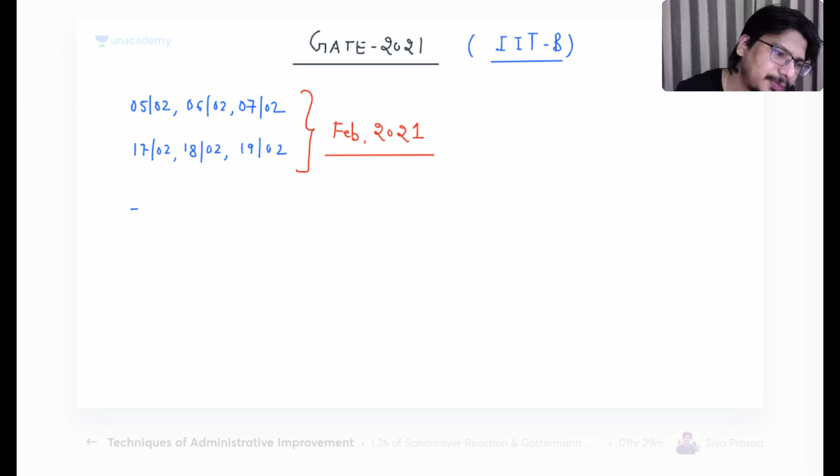Okay, next big information, please listen carefully to whatever I am saying. Now third year students are also eligible for writing the exam. Whoever are third year students, they are also eligible for writing the GATE 2021 exam. Those who have just entered fifth semester, they can prepare for the exam and write it in 2021.

Now the next point, which is very important from the GATE 2021 point of view, listen carefully. Now you can write the GATE exam if you want — it's optional. If you want, you can write GATE with 2 papers.

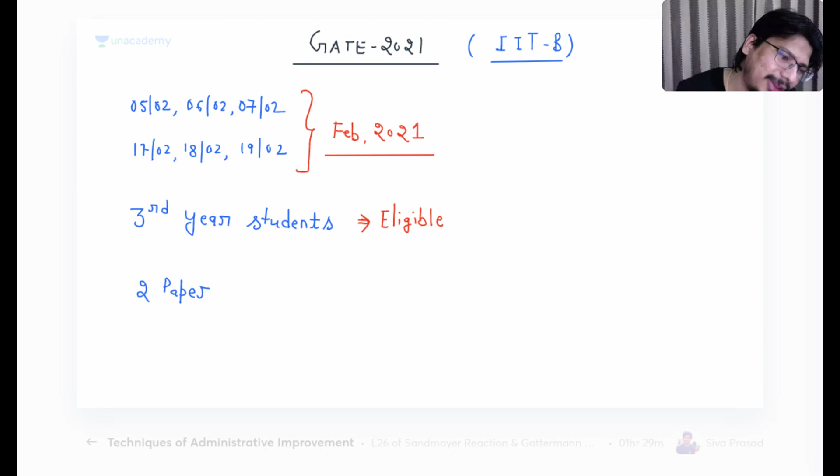आप एक पेपर मैकेनिकल ले सकते हैं, आप एक पेपर सिविल ले सकते हैं, और दूसरा कोई भी पेपर चूज कर सकते हैं. वो सब्जेक्ट्स क्या क्या हो सकते हैं उसकी टेबल आएगी आपको कि आप कौन कौन से सब्जेक्ट चूज कर सकते हैं. If you are in mechanical, if you are writing your one exam with the mechanical background, what are the other subjects you can choose, तो उसकी टेबल आपको जल्दी ही मिल जाएगी.

Yes दिव्यांग, at my time earlier we used to write the gate exam in third year also. तो याद रखना 2 पेपर और हैं. Yes, you can write.

So all this information right now is not on website because today is Sunday, तो अभी शायद नहीं होगा. Maybe by Monday it will be getting updated on website also.

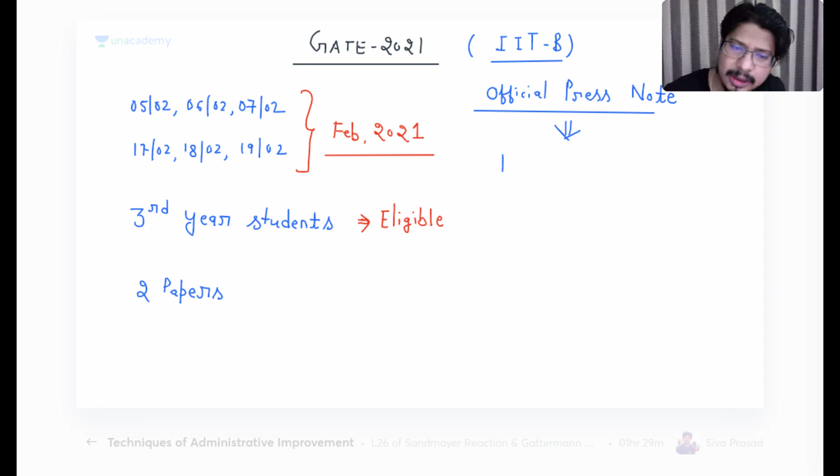Sir, from where you got this information, my friends? We got the official notification given by IIT Bombay. Official press release from IIT Bombay. एक ऑफिशियल प्रेस रिलीज निकला है, प्रेस नोट निकला है, ऑफिशियल प्रेस नोट रिलीज हुआ है. वहां पर ये सब इंफॉर्मेशन है. There we are having all this information. Yes, and this was there on the Facebook page of Director IIT Bombay. डायरेक्टर IIT बॉम्बे के अगर आप फेसबुक पेज पर जाएंगे तो आपको ये इंफॉर्मेशन मिल जाएगी.

Bittu is asking, sir, benefits of 2 papers. There are so many interdisciplinary branches. When you are going for the higher education, there will be so many interdisciplinary branches, तो आपके लिए admissions के options ज्यादा खुल जाएंगे. You will be having more options of admission in your MTech.

XE के पेपर के बारे में इंफॉर्मेशन चाहिए? चलिए, I will be giving you 5 minutes information on XC also. XC होता क्या है? Let me tell you. Are you interested for knowing the information about XC also? क्या आप जानना चाहते हैं? Are you interested? What is XE? Okay.

देखिए मैं आपको बताता हूं. XE represents engineering sciences. Now what happens in XE? I will be telling you बेटा. देखो ध्यान से, XE में क्या होता है? आपका पूरा पेपर, it will be divided into 2 parts. The complete paper will be divided into 2 parts. Part 1 is general aptitude. जो पहला पार्ट होता है वो जनरल एप्टीट्यूड होता है, जो कि लगभग हर पेपर में होता है.

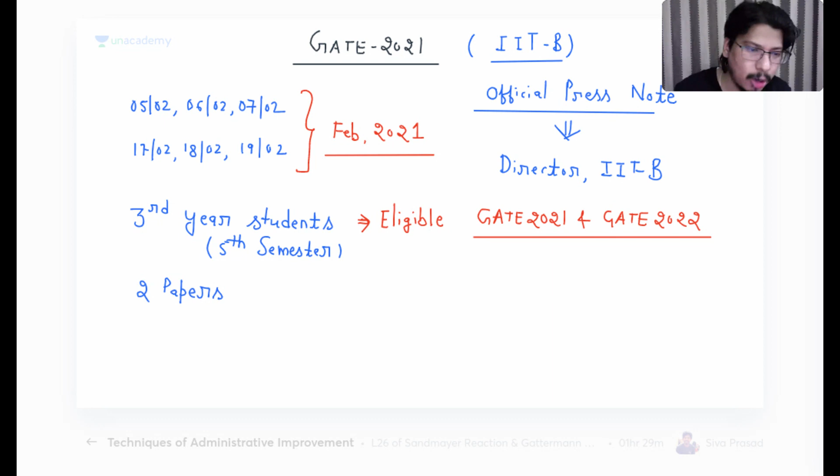Those who are in third semester right now, remember, now you are not having 2.5 years, because you will be writing your first GATE exam in 2022, and you will be writing your next GATE exam in 2023. So now you don't have much time left.

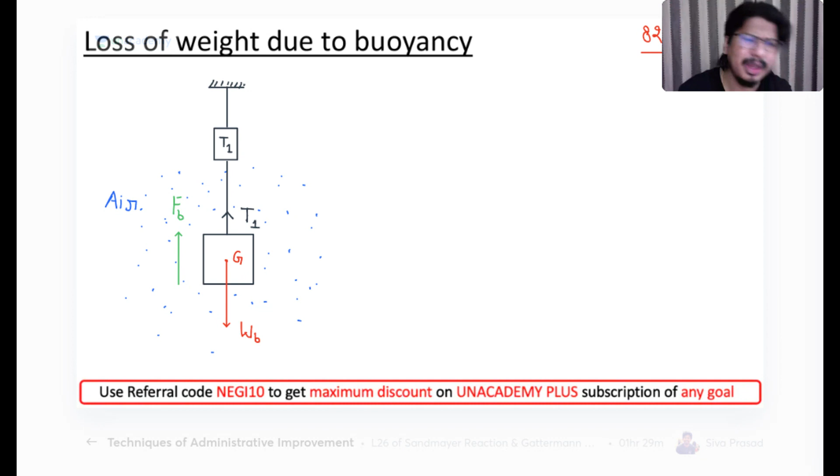Yes, very good, Malik. Now anyone in the class can tell me, what will be the force equilibrium? Can you tell me what will be the force equilibrium, beta?

Yes, total vertically upward force, that is T1 plus FB, must be equal to WB. Now that means T1 is equal to WB, weight of the body, minus the buoyant force acting on the body.

Anyone in the class, what will be the buoyant force acting on the body?

Anyone in the class? Density of air into volume submerged. How much will be the volume submerged? Whatever is the volume of the body, that is your volume submerged. Yes or no? Excellent, yes. So rho A into volume of the body into G.

What is the density of air - is it very high or very low? Bolo re baba, density of air is very high or very less? Yes, it is very low. So what is going to happen? Since the density of air is very less, this is negligible.

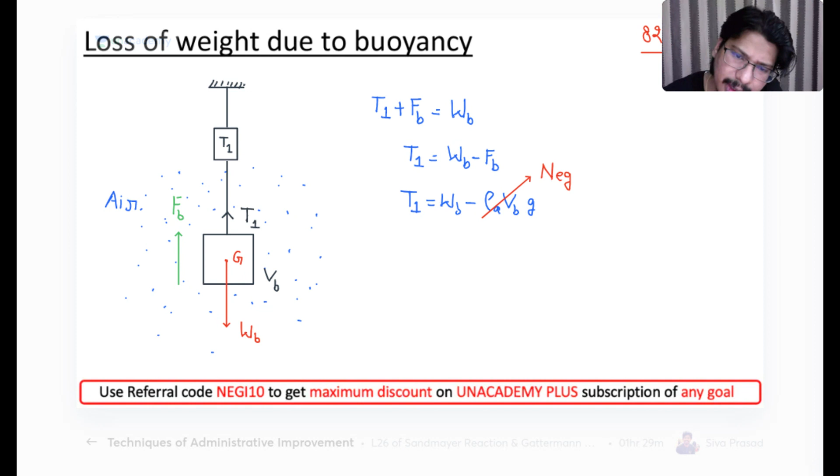I have told you earlier also in my class that buoyant force exerted by air is negligible. So what I'm getting is T1 is nearly equal to what? T1 is nearly equal to WB.

Now what is this T1? Can I say T1 is almost whatever the reading T1 I'm getting? T1 is the reading of the tensionometer. So can I say one thing clearly? T1 is representing the real weight only. Can I say whatever this T1 reading I'm getting, that is actually your real weight. It is equal to weight of the body.

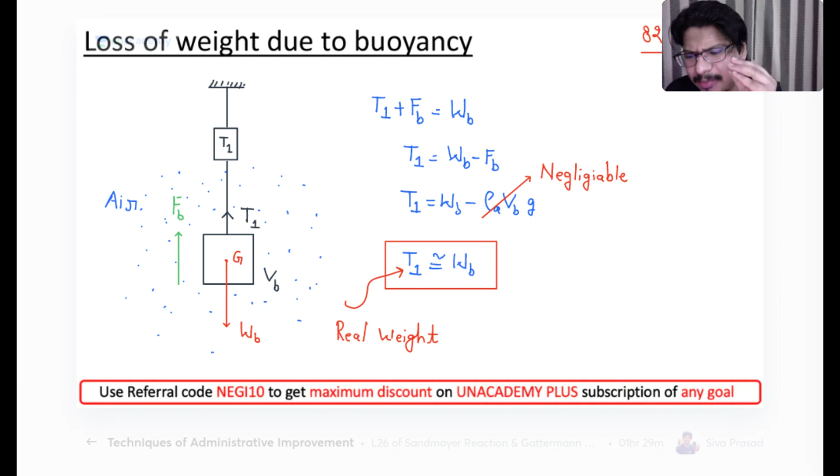Can I say whatever this T1 reading I'm getting - this is what we apply in Engineering Mechanics. Yes yes yes. So whatever the reading T1 I'm getting, that is giving me the real weight.

Now listen carefully. Now, yes, clear. Listen carefully. Let us suppose, Chirag, welcome beta. Let us suppose, now listen carefully, let us suppose I am having the same body.

Let me say this is the centroid, this is the center of gravity of the body. Let me call it like this. And from here, weight of the body is acting. Now listen carefully, let us suppose this is hanging with some rope, this weight is hanging with some rope.

Oh my god, what will happen? Please observe, beautiful thing, now look at here. Let me say this body is completely submerged in water. Let me say density of the water is represented by rho W.

Rho W is equal to constant. Let me say the volume of the body is VB. Can I say this water will be applying some buoyant force on this body?

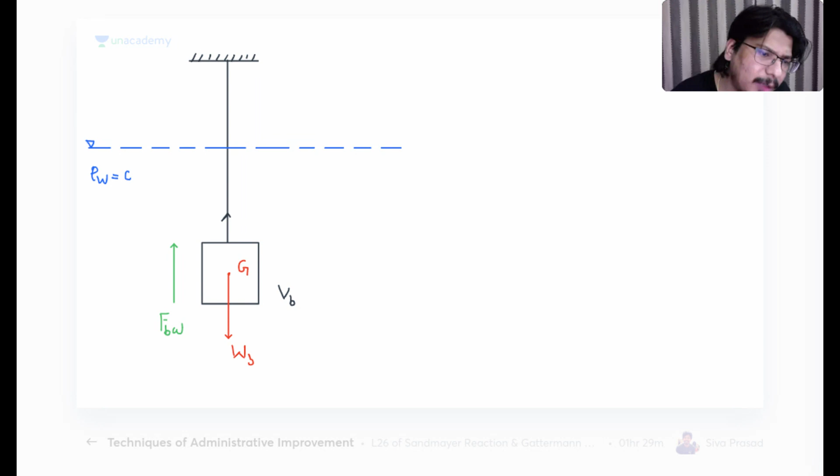So let me say the buoyant force applied by water on this body is FBW. 100%, there is no doubt, 100% there will be some tension in the rope. And let me say this tension I am measuring with the help of some tensionometer. 100% the reading of this tensionometer will be

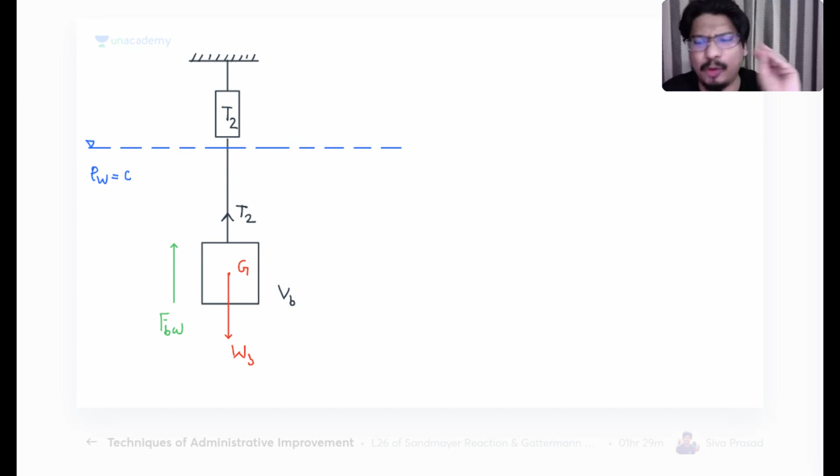T2. Now anyone in the class - yes, you can't neglect density here. Yes, Swaru, very good. Can you tell me if I apply the force balance here, what will be the force balance giving me?

Bolo re baba. Total vertically upward force is equal to total vertically downward forces. So what I'm going to get is T2 plus FBW is equal to WB. So T2 is how much? WB, weight of the body, minus buoyant force applied by water.

Anyone in the class can tell me what will be the buoyant force applied by water? Since this body is completely submerged in water, it is density of water, volume submerged into G. Now here you cannot neglect this buoyant force.

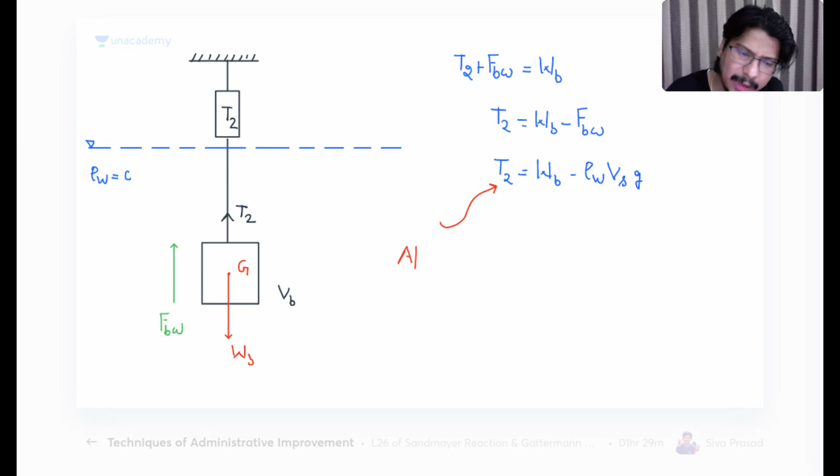So 100%, whatever the reading T2 I'm getting, whatever the reading of the tensionometer T2 I'm getting, that is not the actual weight, that is not the real weight. That is known as what? Anyone in the class? This is not the real weight, this reading is not giving me the real weight. It is giving me the apparent weight. Yes, excellent, this reading is giving me the apparent weight.

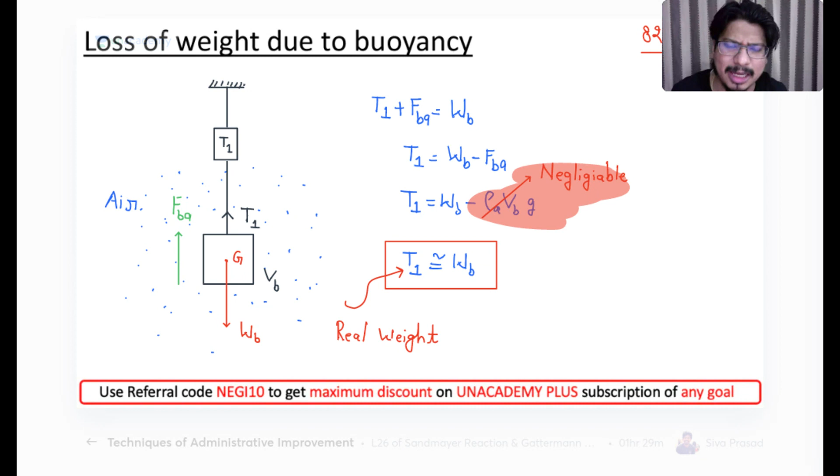When I put a body in air, I get the real weight because the buoyant force applied by air is negligible. But when I put the same body in liquid, in water, the buoyant force applied by the water is not negligible. Because of that, the reading T2 that I get is not the real weight, it's the apparent weight. Are you able to understand?

Now listen carefully. Let me say this was equation number A. Let me say this is equation number B.

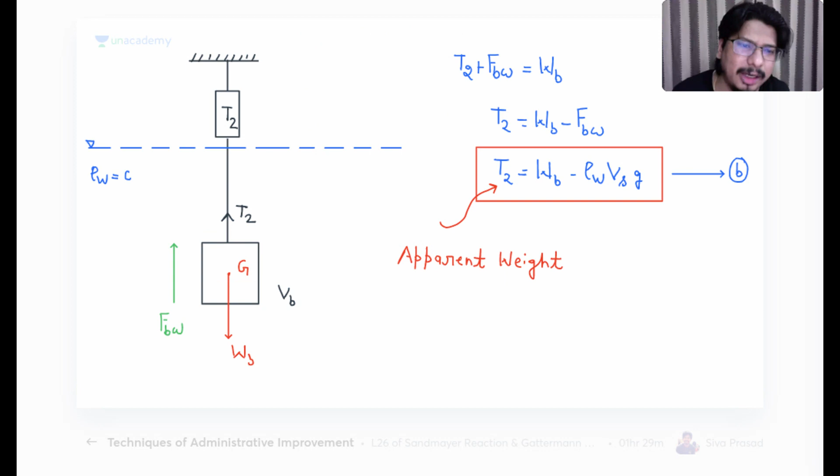What are you getting from equation A and equation B? Can I say, T2 in place of WB? What is WB? Weight of the body. Weight of the body is T1. So can I say T2 is equal to T1 minus something?

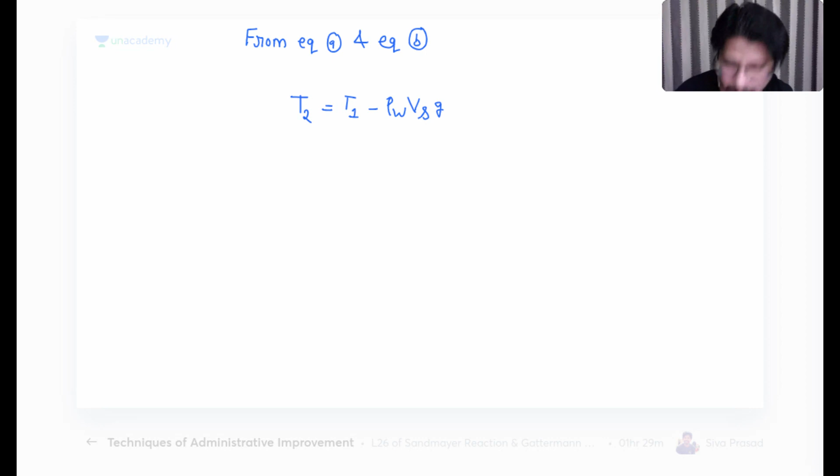Rho W Vs into G. I hope you are able to understand this equation: T2 is equal to T1 minus rho W Vs into G. Is it clear to everyone?

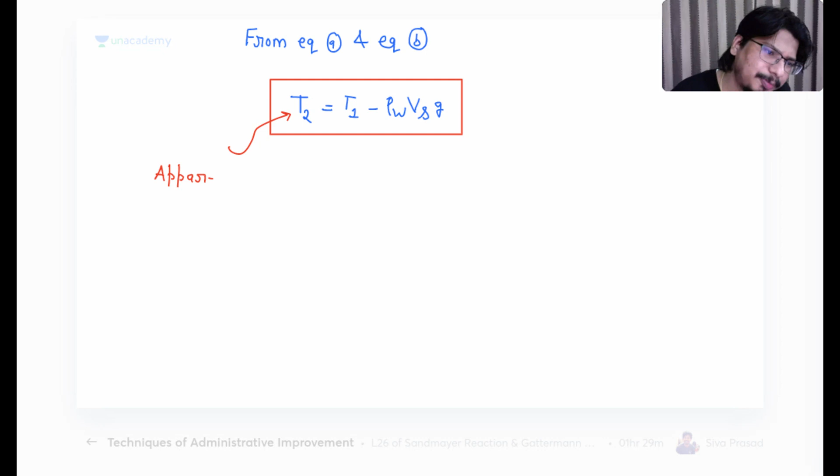Now listen carefully. What is this T2? T2 is apparent weight. What is T1? T1 is the real weight. So apparent weight is always less than real weight.

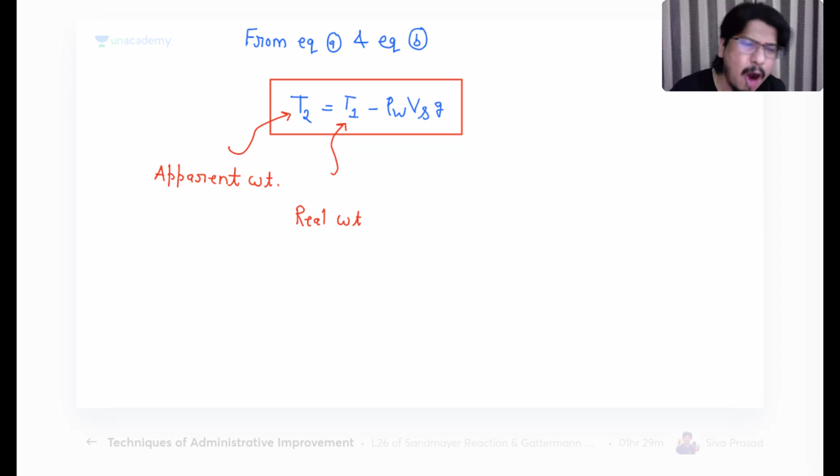How much less? This much less represents the loss of weight. Basically, loss of weight is the buoyant force applied by the liquid.

Is it clear to everyone? Yes sir, yes sir, very much clear, very much clear.

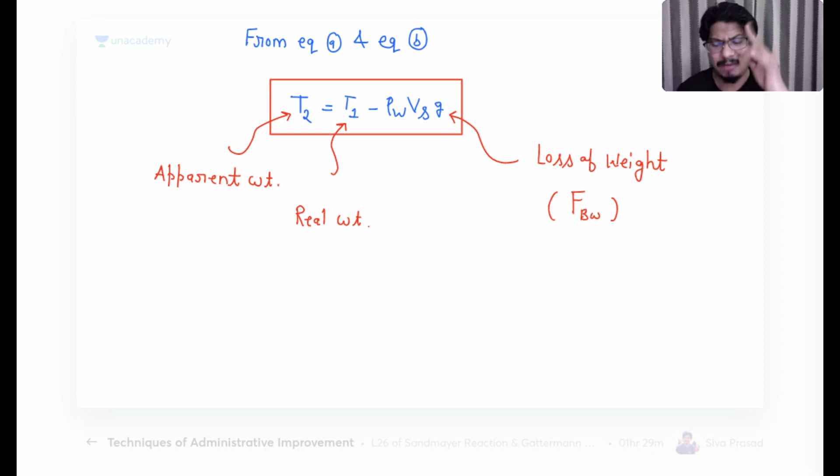Then I will be asking you one beautiful interview question. Try to answer me. Look at here, my friends, try to understand what I'm saying.

Let us suppose I'm having a container, and this container has some liquid, and this is the free surface of the liquid. Let me say the weight of the liquid is WL, and the weight of the container is WC.

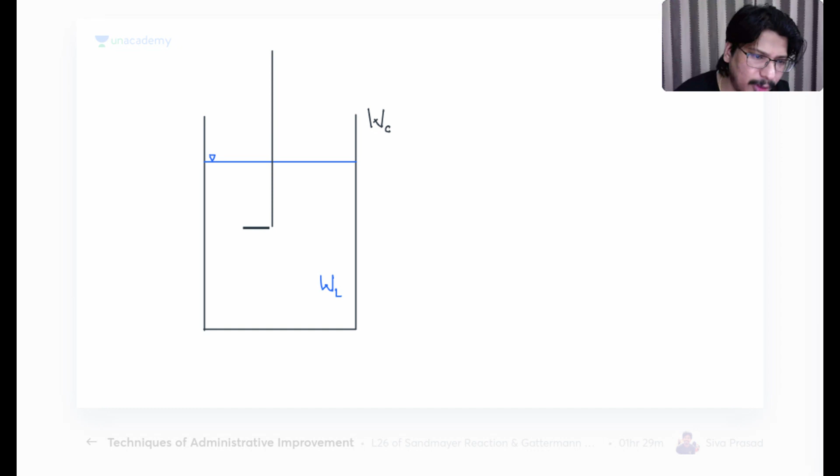Now look at here. Let us suppose a body is hanging like this, and let me say the weight of this body is WB. This rope has some tension, and this tension can be measured with the help of a tensionometer.

Now my question is very simple. Listen carefully what I'm asking. Let us suppose the reading of the tensionometer is T1. What will be T1? Anyone in the class? Type in the chat box.

What will be the apparent weight here? What will be T1? Type in chat box. Yes, very good, excellent, you are absolutely correct.

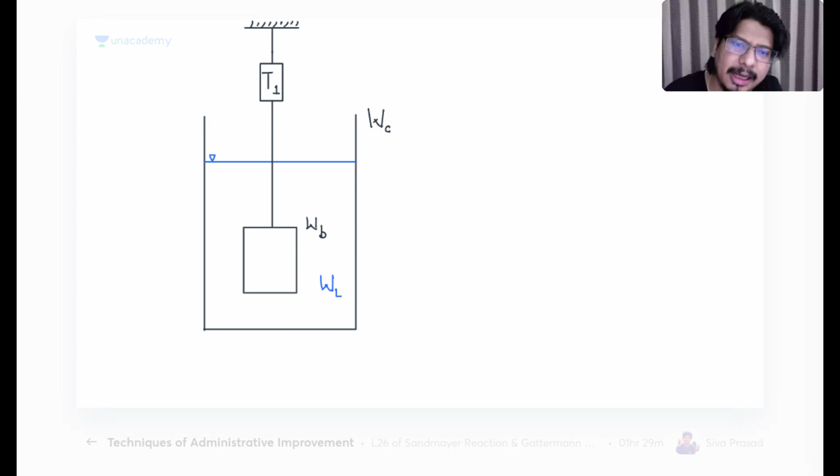T1 will be equal to weight of the body minus the buoyant force applied by this liquid. Yes, you are absolutely correct. 100% weight of the body will be acting vertically downward, there is no doubt. And the buoyant force applied by liquid will be acting vertically upward on this body. So I'm getting T1 is like this.

This question was very easy, I'm not interested in this one. Now let us suppose I'm having some weighing bridge here, where I can measure the weight, whatever load is acting on it I can measure. Let me say this weighing bridge is giving me the reading T2.

Any intelligent student of the class can tell me what will be T2? 1 rupee prize money, whoever gives the right answer, I will be giving 1 rupee.

WC plus WB plus WL? No no no no, absolutely wrong answer. Only WC? Okay, what else? I want everyone to try this question.

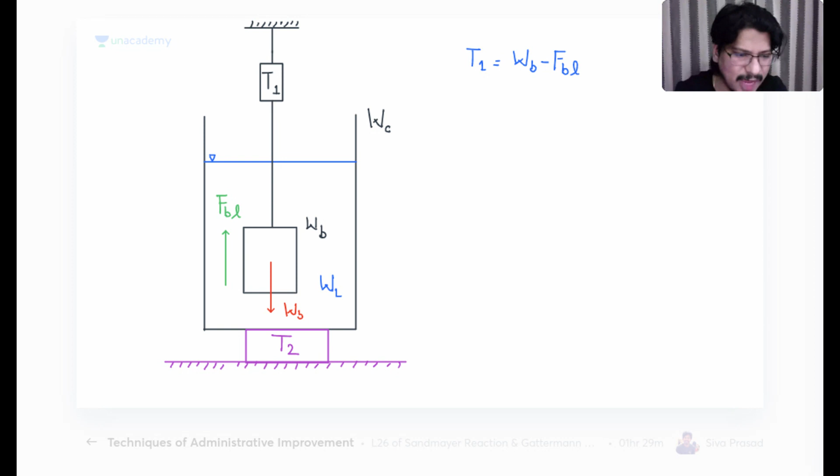What I'm saying is, let us suppose this is some weighing bridge. I'm asking you clearly, what will be the reading of this weighing bridge? What will be the value of T2?

Still I'm not getting the right answer, oh my God. Now someone is trying but wrong answer. Ananya, no no no, somewhere some mistake, oh my God, so much confusion.

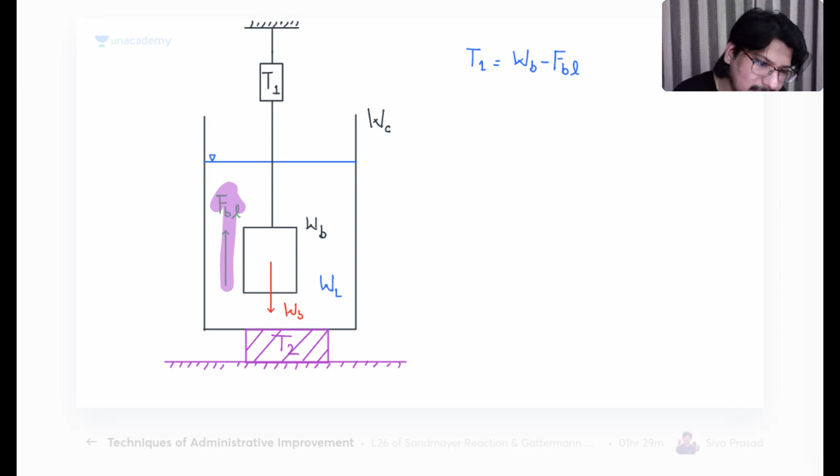So what will be the direction of reaction force? Is anyone understanding? Reaction force will be acting on the liquid in vertically downward direction. This is the reaction force which will be equal to the buoyant force applied by the liquid.

So basically what I'm saying is the reading T2 will be equal to 100% weight of the container, 100% weight of the liquid, but extra force will be acting downward because of the reaction force applied by the hanging body on the liquid. So that reaction force acts downward.

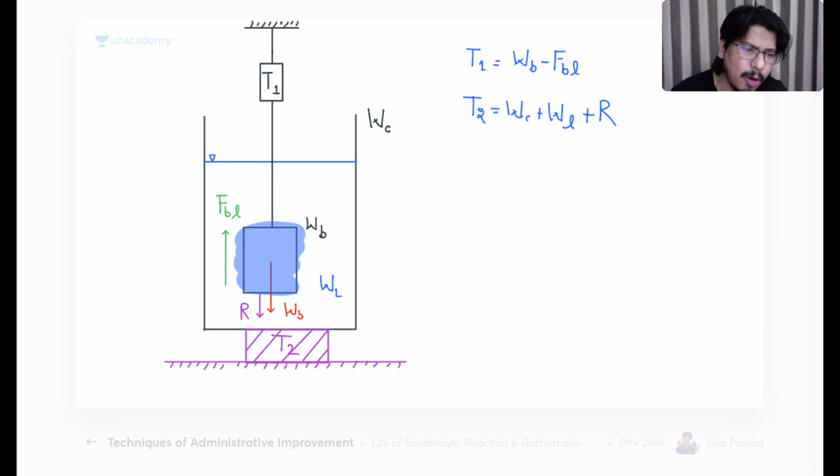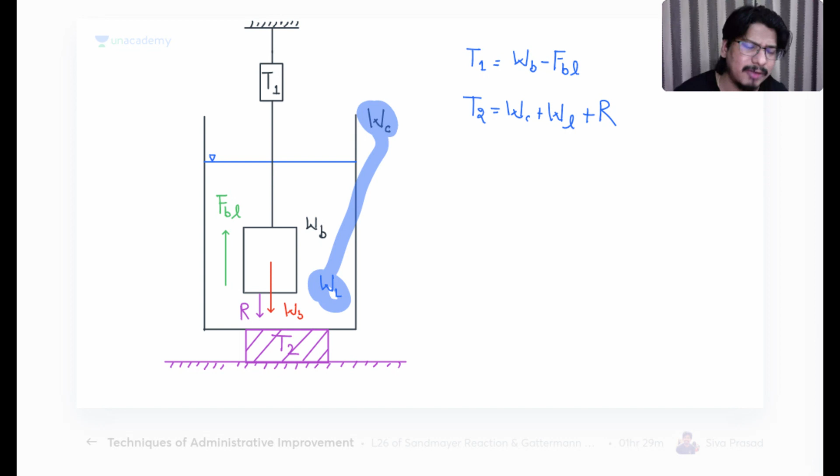Meaning, listen carefully, when there was no body submerged in this tank, then the reading T2 will be what? Weight of the container plus weight of the liquid only. When there was no body submerged, the reading will be WC, weight of the container plus weight of the liquid only. But the moment I'm submerging a body, what is happening?

This body will be applying the reaction force in vertically downward direction. Because of that, this reaction will come. Remember, the magnitude of this reaction is nothing but simply the buoyant force exerted by the liquid only. Is it clear? Reaction force will be equal to the buoyant force applied by the liquid on the body. Is it clear to everyone?

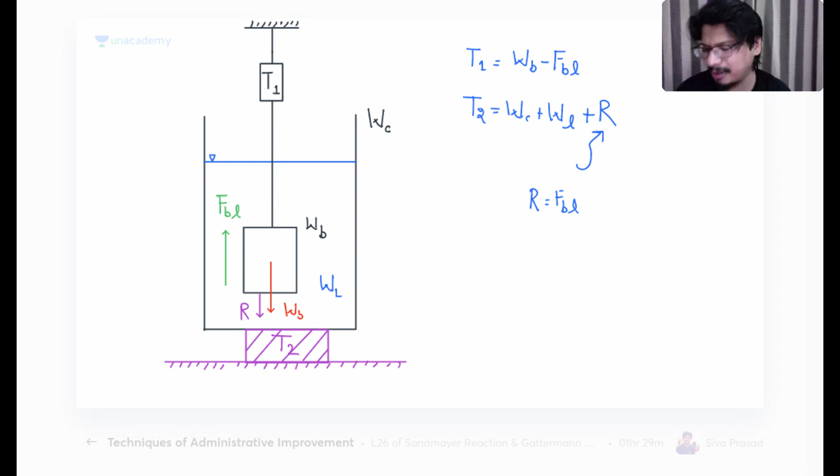If you are clear till here, then we will be moving forward. Beautiful interview question for you people, my friends, they will be asking such interview questions.

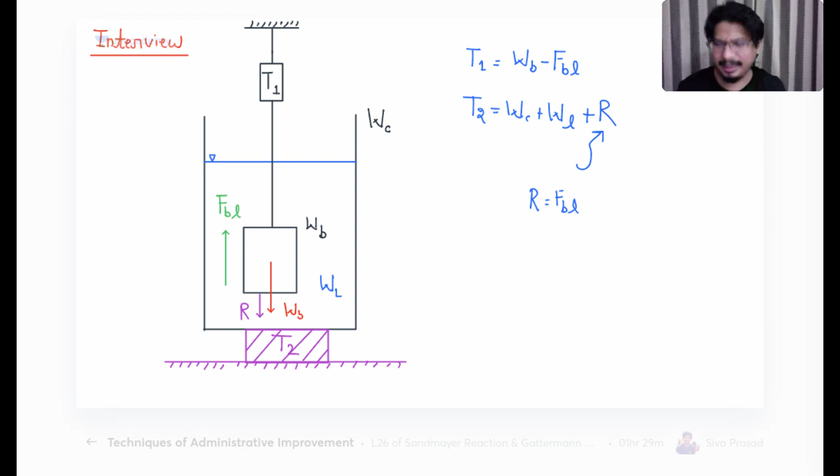In exam, in interview, you should be clear with this. There is nothing to explain here. If there is no body, look here. T2 will be equal to WC plus WL.

When I'm submerging some body, this liquid will be applying some vertically upward buoyant force. In turn, what will happen? The body will be applying a reaction force vertically downward. So this weighing bridge will be taking account of this reaction force also.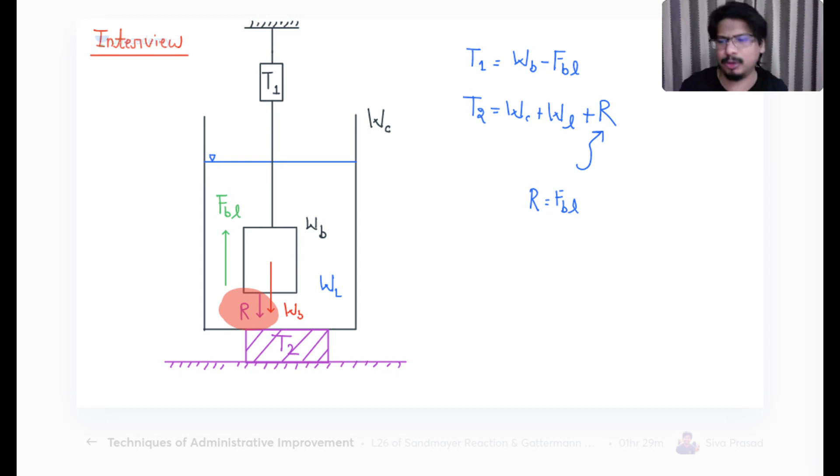Fine, welcome. Now very important thing, my friends. Now I'm going to discuss a very important thing. Tell me, what is rolling, pitching and yawing? Anyone knows the meaning of rolling, pitching and yawing? Tell me, what is this rolling, pitching, yawing? Have you heard about it?

Type in chat box and confirm me. What is the meaning of rolling, pitching and yawing? Type in chat box and confirm if you have little idea about this. Otherwise, I will be telling you. If you have little idea, please type in chat box.

Okay, okay, okay. I will explain, my friends. Yes, so for my beautiful students, I got the beautiful diagram.

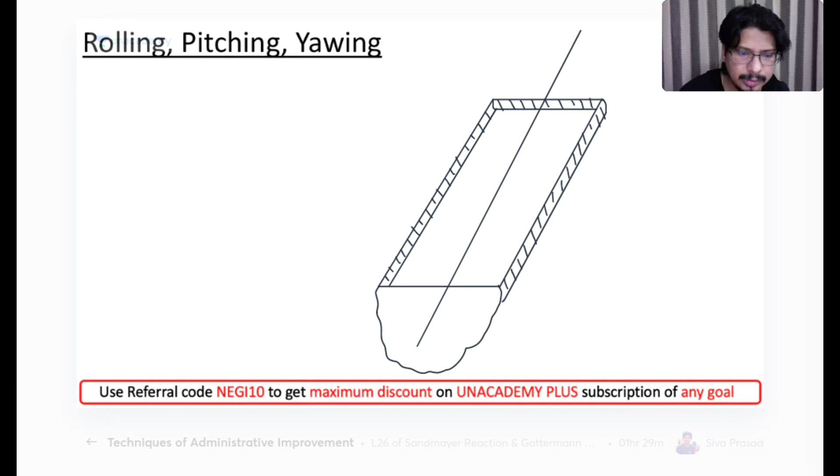Let me say this is one of the directions which is along the length. Can I say this is the direction which is along the length? Are you clear till here? So let me call this the longitudinal axis, LL. This is the longitudinal axis.

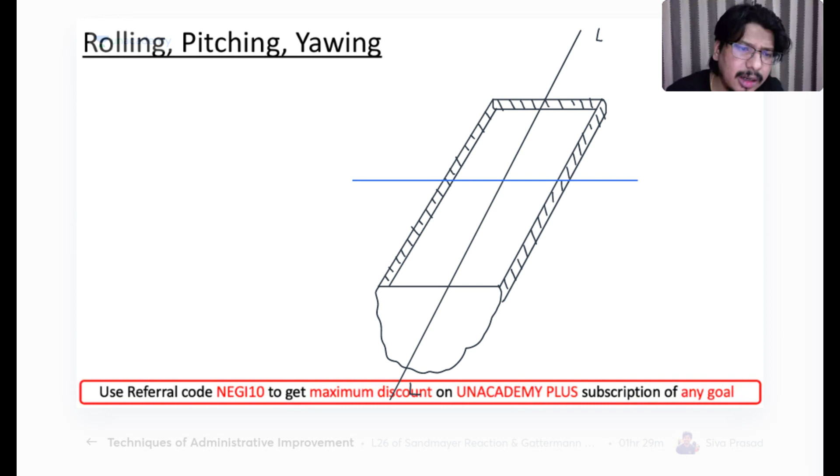Now can I say this is another direction which is along the width? Let me call it MM. This is your lateral direction, lateral axis you can say. Longitudinal axis and lateral axis.

Longitudinal axis. Now listen carefully, can you see there will be one more axis which will be like this? Can you see this, my friends? Are you able to see? Let me call it the normal axis.

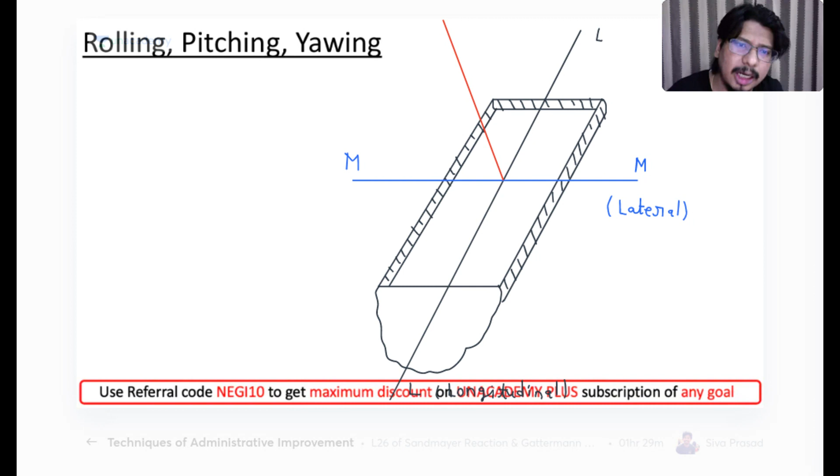So I have explained three axes till now. One is the longitudinal axis which is along the length. There is another one, lateral axis, which is along the width. The third one is the normal axis.

Okay, now listen carefully. If you are having oscillation about the longitudinal axis, about which axis, beta? About this longitudinal axis, then it is known as what? Rolling. It is known as rolling.

If you are having oscillation about the lateral axis, then it is known as what? Pitching. Very good, excellent. Now if you are having oscillation about the normal axis, then it is known as what? Yawing.

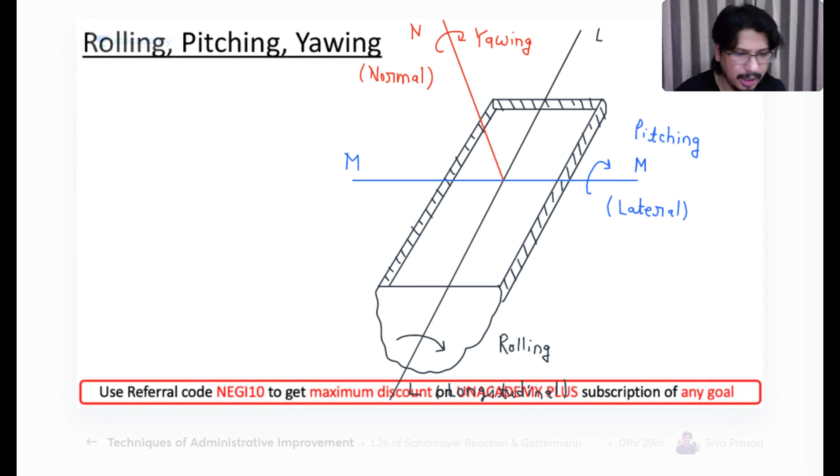Now I want to give you one more thing. Listen carefully, a little more information I am giving, listen carefully. If you are having movement in the longitudinal direction, then it is known as surging.

Now look here. If you are having movement along this lateral axis (not oscillation), then it is known as swaying. You must have learned in Theory of Machines, in the balancing chapter, about this swaying couple. So that sideward motion is known as swaying.

Okay, now if you are having the motion in this direction, what do we call it beta, does anyone remember? The motion in this direction is known as what? Heaving. Yes, very good Prakash, correct. It is known as heaving.

So I hope everyone is clear with all these things. Are you clear till here? Let me ask you a question then. Let us suppose I am having a body like this.

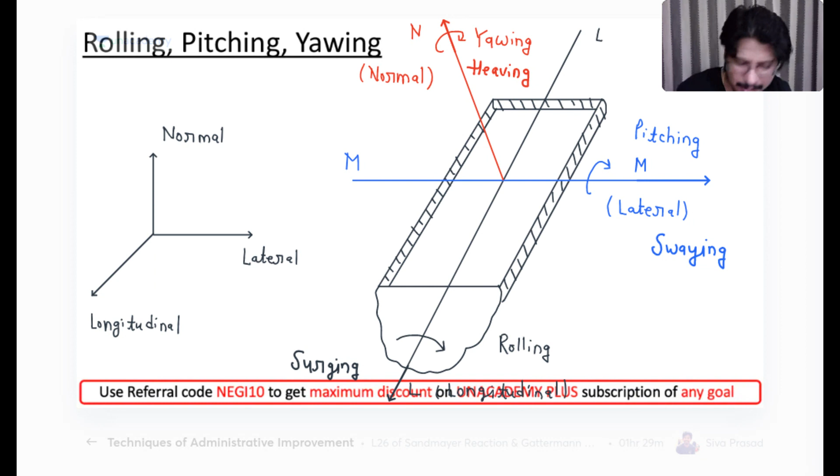About this longitudinal axis, I am having rolling. About this lateral axis, I am having pitching. About this normal axis, I am having yawing. Correct? Okay, tell me one thing.

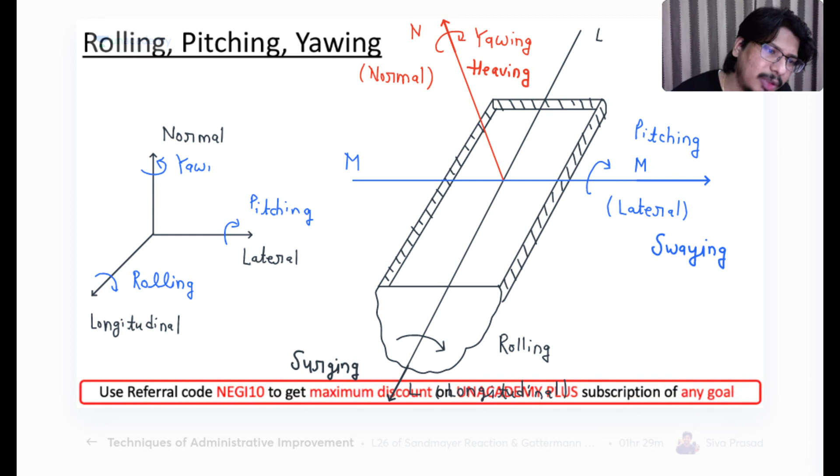Let us suppose I am seeing from the top. If I am seeing from the top, what are the dimensions I will be able to see? If I am seeing from the top, what are the dimensions I will be able to see? We will see, beta Niket, we will see. If I am seeing from the top, what dimensions am I going to see? I will get length and I will get to see width.

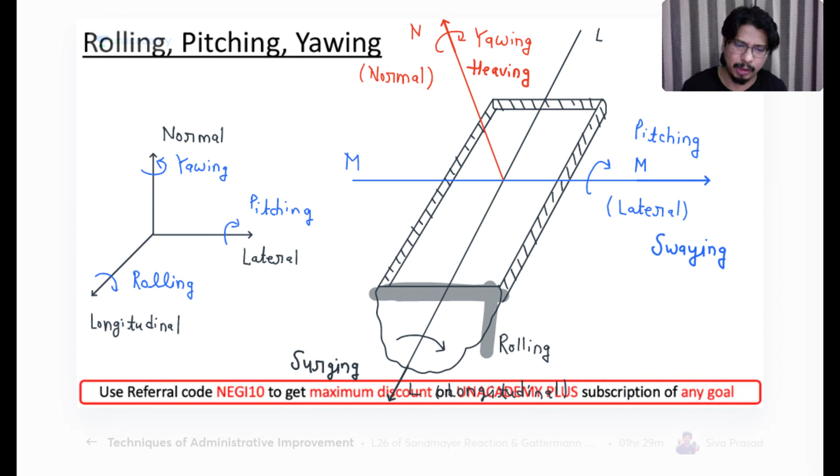In front view, what will you see? You will see width, and you will see depth also. Both width and depth you will get to see. So if you are seeing the front view, you will see something like this.

What is this axis, if I am seeing the front view? This axis is what? This is your lateral axis. Which axis will this be in front view?

This is not longitudinal axis, Mujammil. I am seeing the front view, this is not longitudinal axis. This is what? Very good, excellent, fine. This is your normal axis.

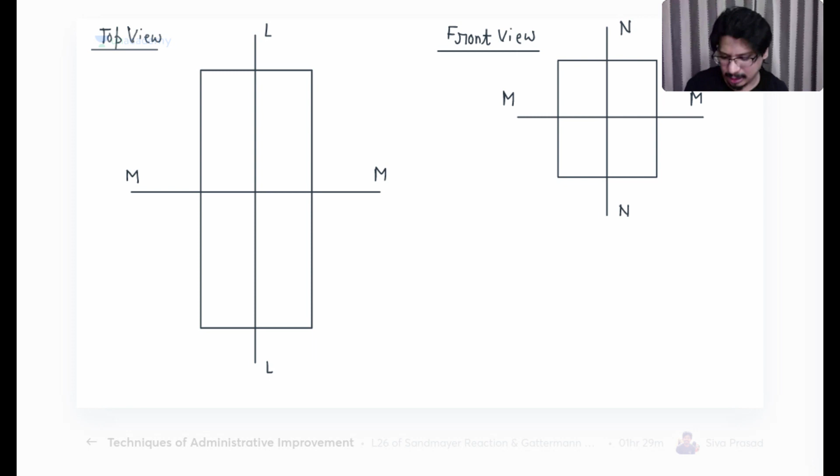Now look here. Let me say along the length, this dimension is L. Let me say this dimension width is W. Let me say this height, depth, is H.

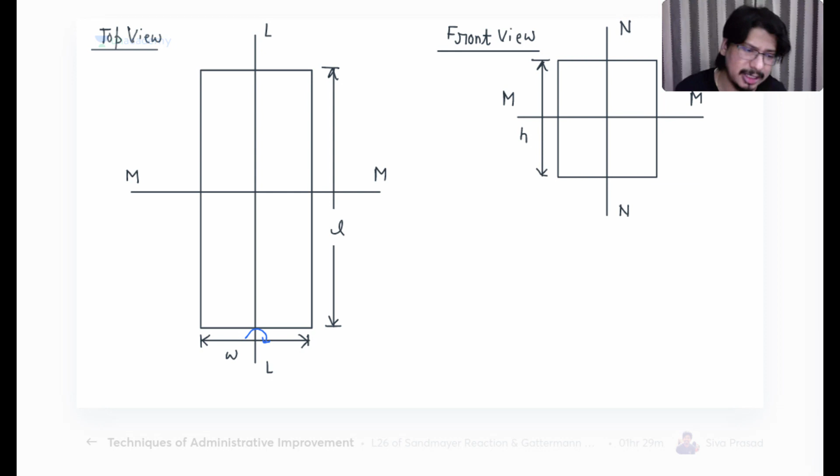Now you have to tell me one thing very clearly. If I am having oscillation about this longitudinal axis, what am I going to have? If I'm having oscillation, I'm going to have rolling. Now, if I'm having the oscillation about this axis, what am I going to have? Pitching. That is the reason why longitudinal axis is also known as rolling axis, and pitching axis is also known as lateral axis.

Now, can anyone tell me what will be the area moment of inertia about rolling axis, that is longitudinal axis? Vamsi, tell me clearly. This is your longitudinal axis.

It is cutting which dimension? W, so W cube will come. So can I say LW cube by 12? Is it clear to everyone?

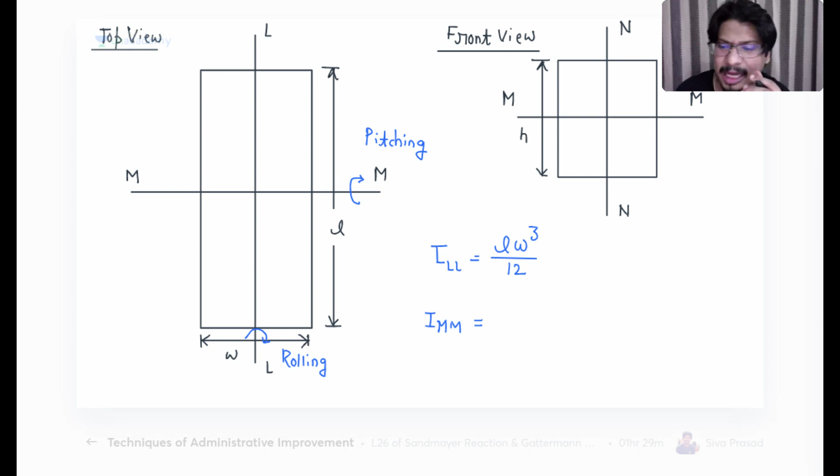What will be the area moment of inertia about pitching axis, that means about lateral axis? About the lateral axis, what will be the area moment of inertia? WL cube by 12.

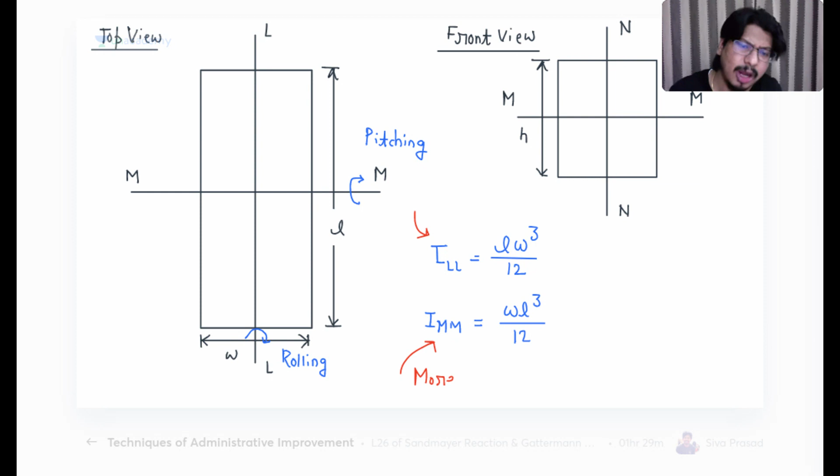What are you able to understand from here? IMM is equal to WL cube by 12. Which one is more, which one is less? Area moment of inertia about lateral axis is more, whereas area moment of inertia about longitudinal axis is less.

Remember, the critical thing is the oscillation about longitudinal axis. Rolling is more dangerous. Why is it more dangerous? Because about rolling axis the area moment of inertia is less, so it is more dangerous.

That's why I will give you an example. You must have seen this. Let me explain what rolling is. Can I say this is rolling? This is rolling, right? And look carefully, this is what?

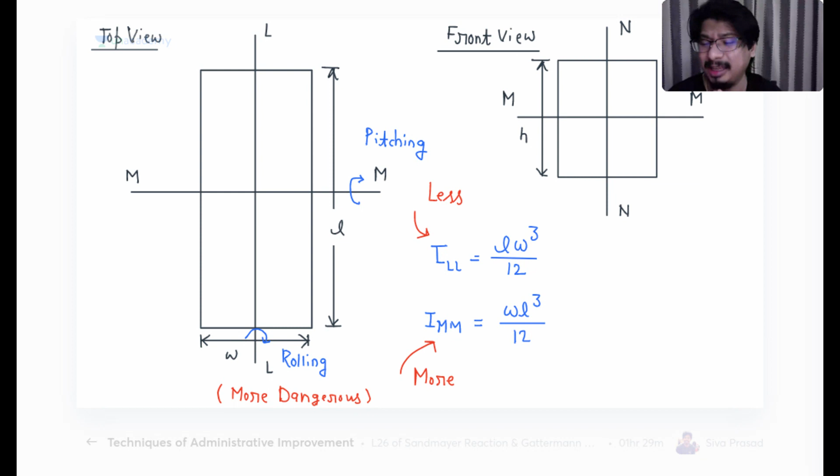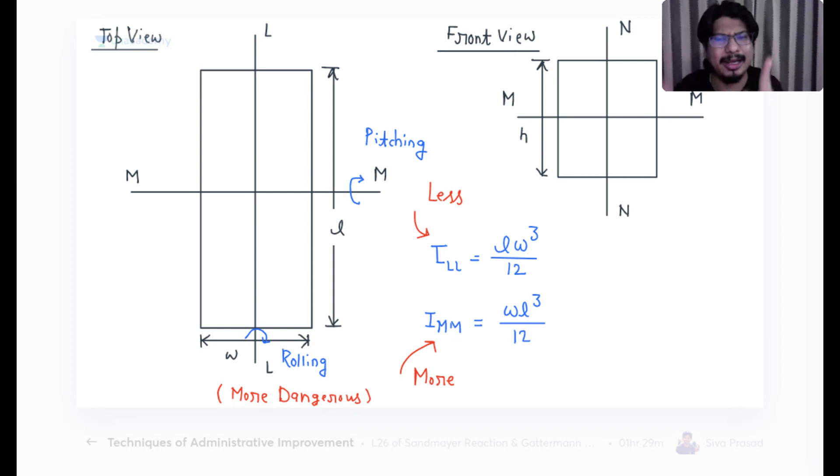Now listen carefully. So what is your aim? Do you want rotational stability about rolling axis or pitching axis first? First, I want rotational stability about rolling axis, because if rolling is safe, 100% automatically pitching will be safe.

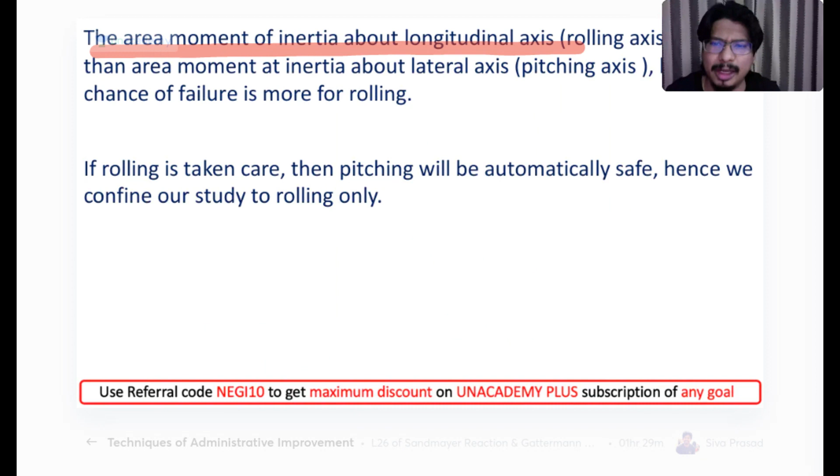So listen carefully. The area moment of inertia about longitudinal axis, which is rolling axis, is less than the area moment of inertia about lateral axis, in bracket pitching axis. Hence, the chance of failure is more for rolling. If rolling is taken care, then the pitching will be automatically safe. Hence, we confine our study to rolling only.

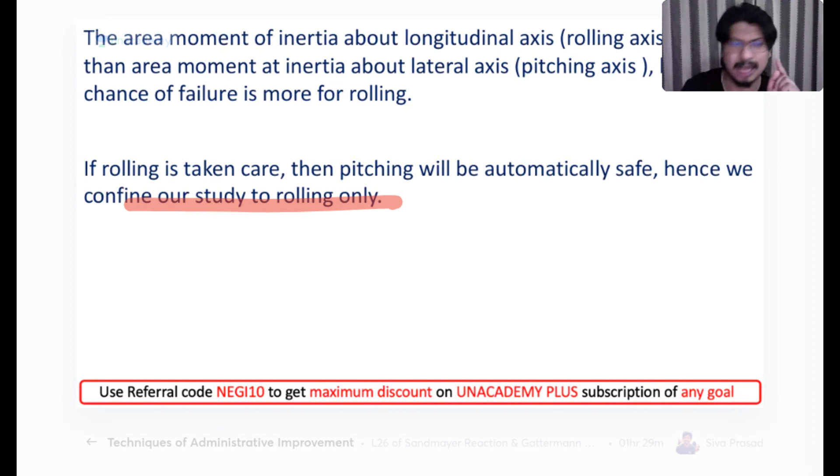Now in the next class I will be discussing the types of equilibrium. I will be discussing the observation for unconstrained completely submerged body, and I will be discussing the rotational stability of completely submerged body.